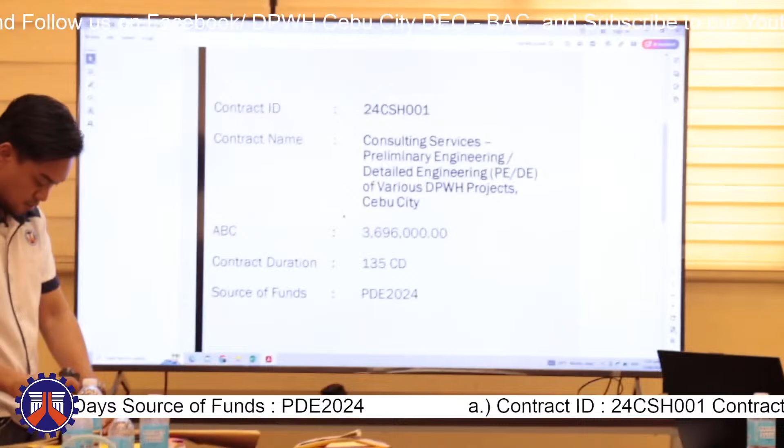Good afternoon. I'll be discussing the consultancy, contract ID 24CSH001, contract name Consulting Services, Preliminary Engineering / Detailed Engineering (PE/DE) of various DPWH projects Cebu City, with an ABC amount of 3,696,000 and a contract duration of 135 calendar days.

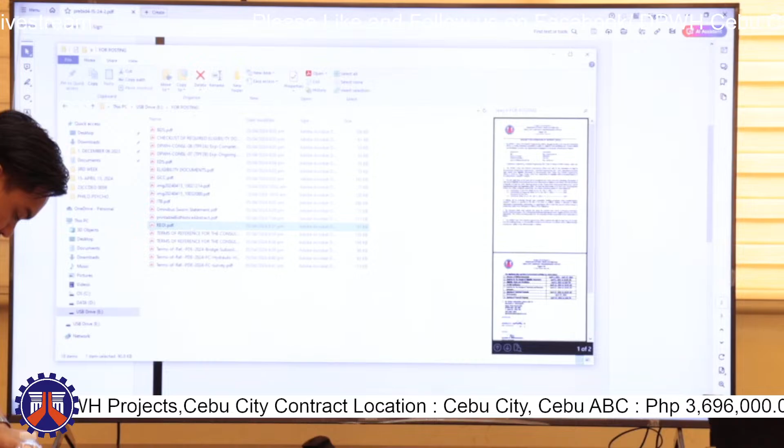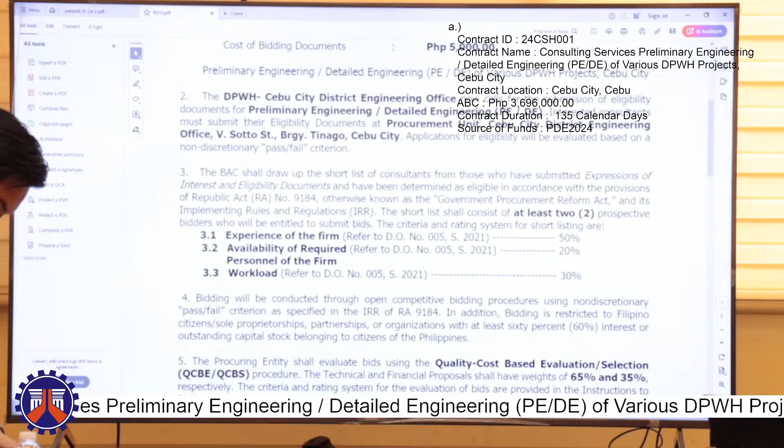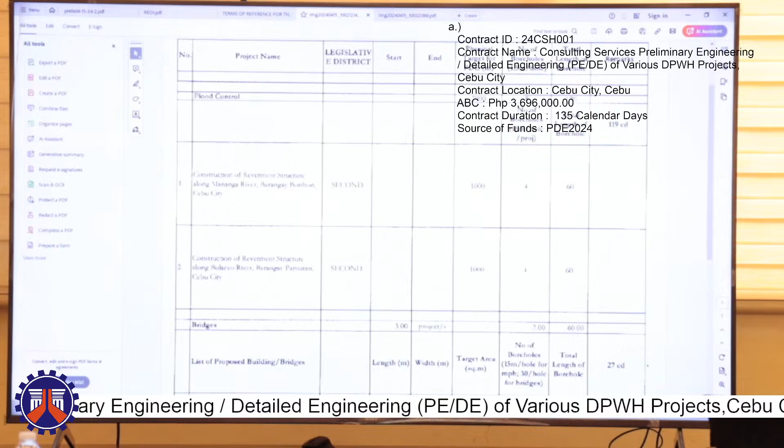This contract comprises 5 projects with consulting services for survey and detailed engineering plans, and also soil exploration or geotechnical investigation.

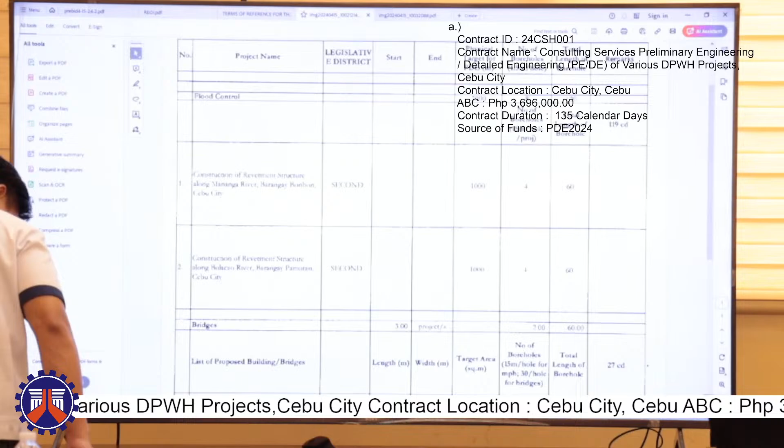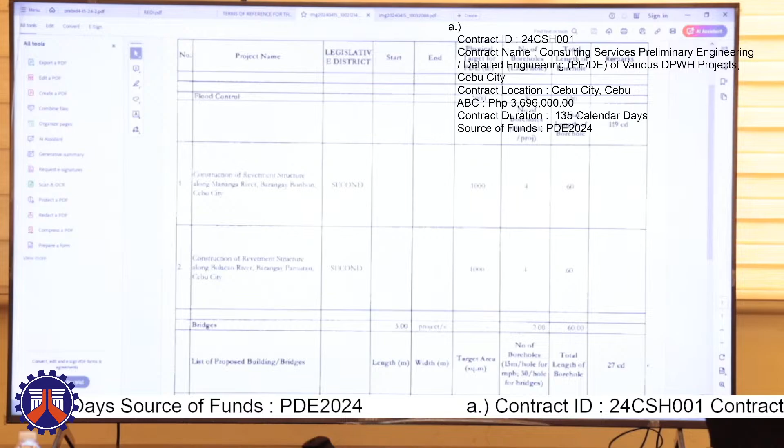For the first project, for flood control, we have the construction of revetment structure along Mananga River, Barangay Bonbon, Cebu City, with physical targets for PDE and survey. This is for survey services and plan generation, detailed engineering plans. We have 1 kilometer or 1,000 meters, and also 4 boreholes for soil exploration or geotechnical investigation, a total of 60 linear meters for the 4 boreholes.

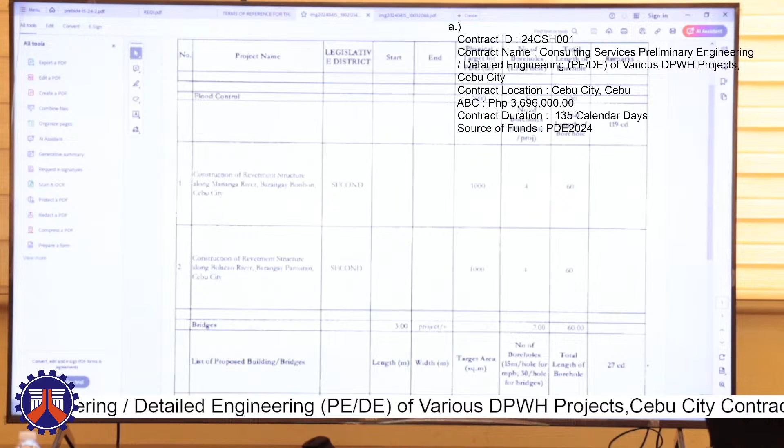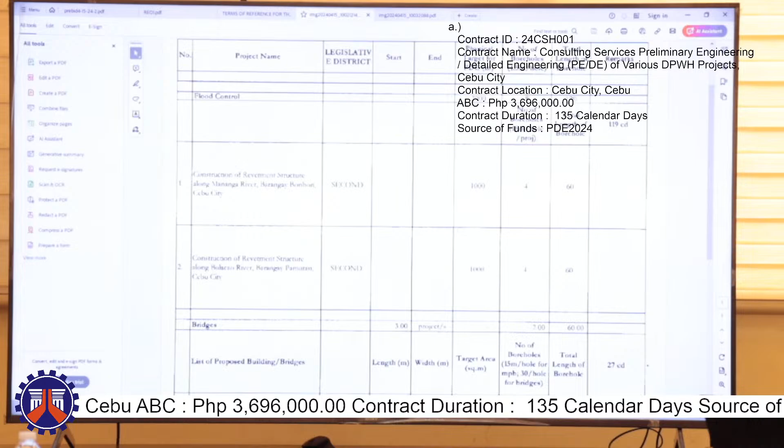For the second project for flood control, it's construction of revetment structure along Bulacao River, Barangay Pamutan, Cebu City. The same, 1,000 meters for survey services and detailed engineering plans, and also provision for 4 boreholes with 15 meters hole depth per hole, so a total of 60 linear meters for the boreholes.

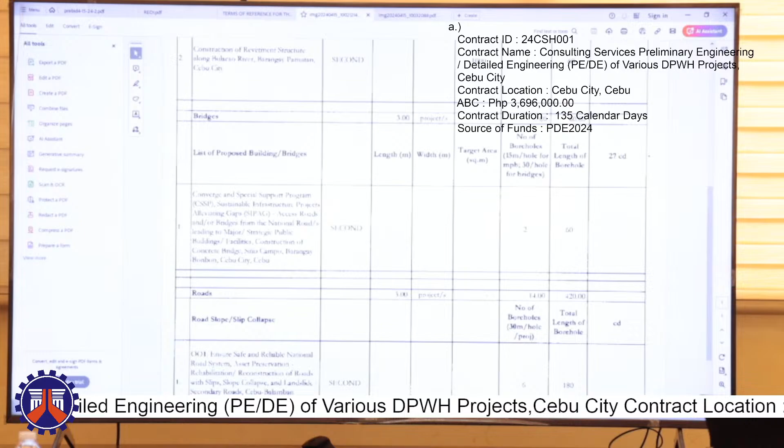Next project is for the bridge. We have the Convergence and Special Support Program (CSSP), Sustainable Infrastructure Project Alleviating Gaps (SIPAG), access road and/or bridges from the national road leading to major strategic public buildings and facilities, construction of concrete bridge, Sitio Campo, Barangay Bonbon, Cebu City. For this project, we only need geotechnical investigation, 2 boreholes with 30 meters depth, a total of 60 linear meters for the 2 boreholes.

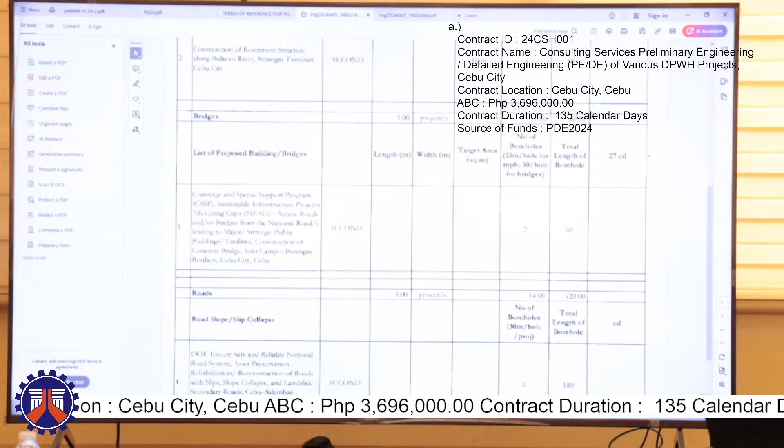For the road, we have 2 projects. Road slip collapse 001, ensure safe and reliable national road system asset preservation, rehabilitation, reconstruction of roads with slip, slope collapse and landslide, secondary road, Cebu Balamban Trans-Central Highway, kilometer 0015 plus 683 to kilometer 0015 plus 727. A provision of 6 boreholes with 30 meters depth and a total of 180 linear meters.

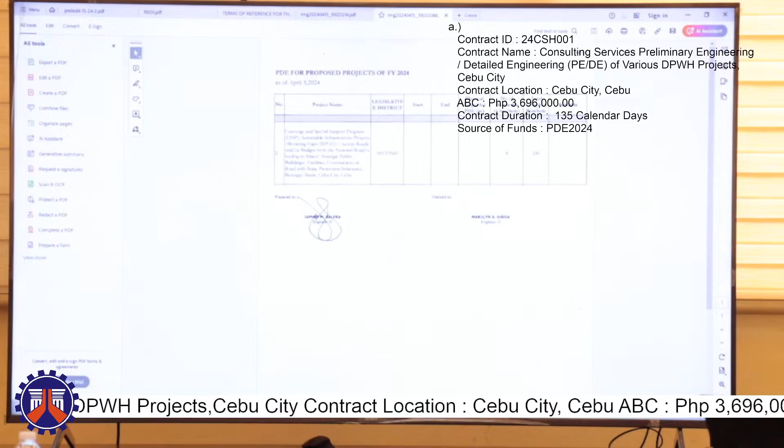The last project for the road is the Convergence and Special Support Program, Sustainable Infrastructure Project Alleviating Gaps (SIPAG), access road and/or bridges from the national road leading to major strategic public building facilities, construction of road with slope protection structures, Barangay Sinsin, Cebu City, with 8 boreholes. Correction: we have 30 meters per hole with 8 holes, so a total of 240 linear meters.

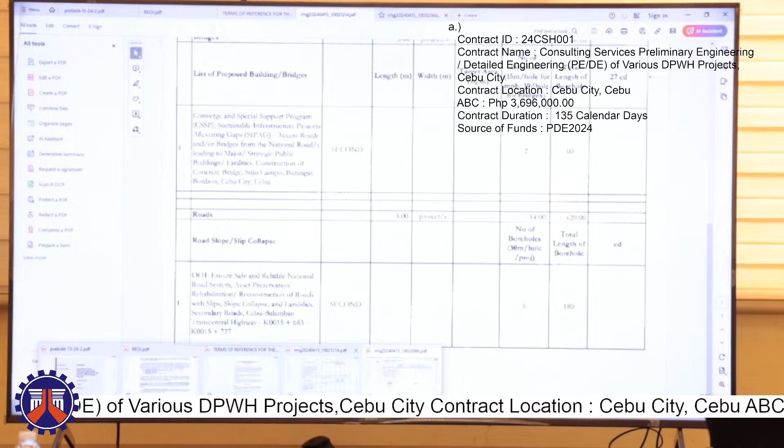So those 5 projects comprise this consultancy service, and together here are the terms of reference for the survey consultancy services and the detailed engineering plans services.

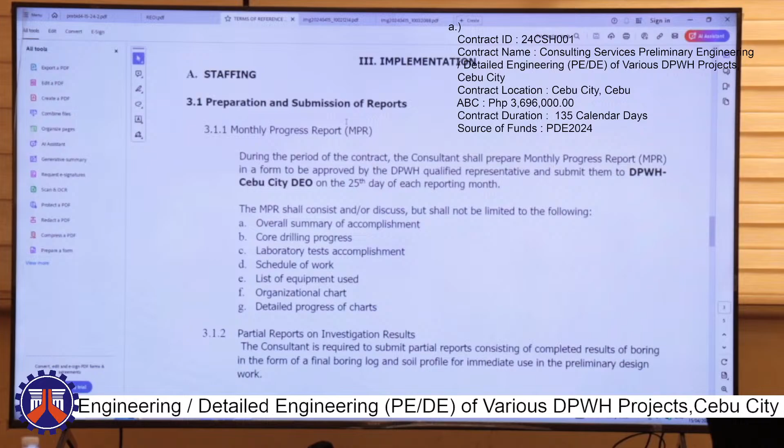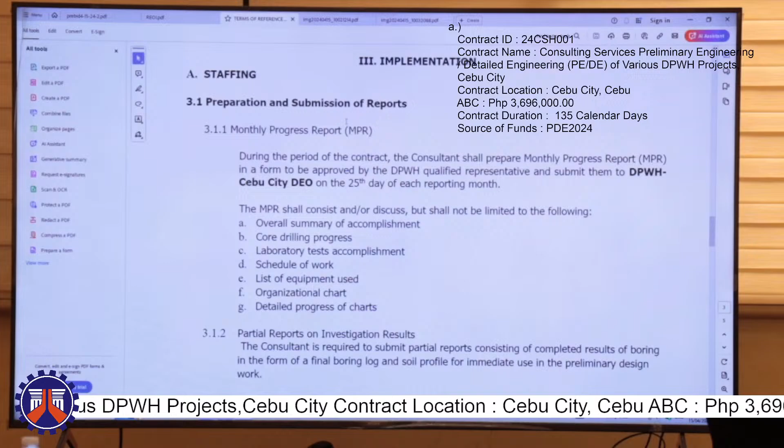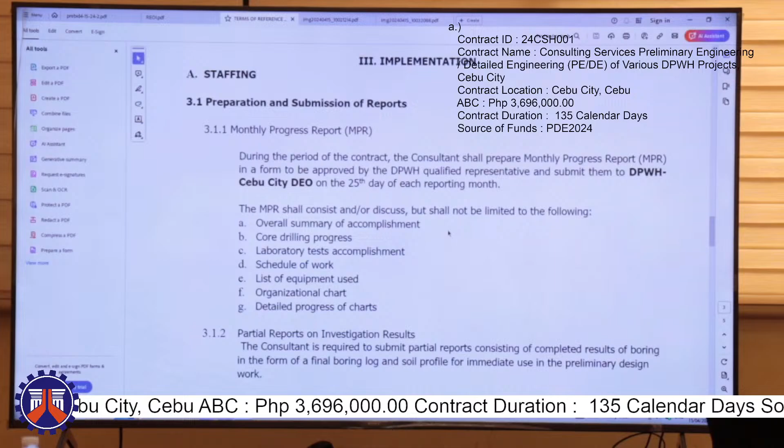For staffing or implementation, preparation, submission of reports: monthly progress report (MPR). During the contract period, the consultant shall prepare a monthly progress report in a form approved by the DPWH qualified representative and submit it to Cebu City DEO on the 25th of each reporting month. The MPR shall discuss, but not be limited to: overall summary of accomplishment, core drilling progress, laboratory test accomplishment, schedule of work, list of equipment used, organizational chart, and detailed progress chart.

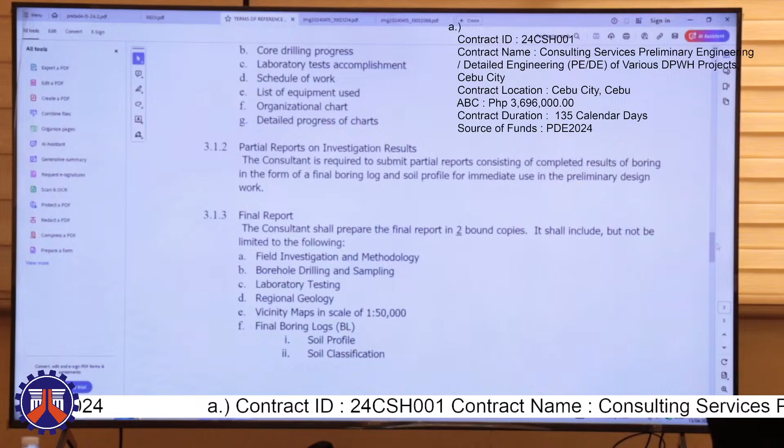We also have partial reports on investigation results. The consultant is required to submit partial reports consisting of completed results of boring in the form of final boring log and soil profile for immediate use in the preliminary design work.

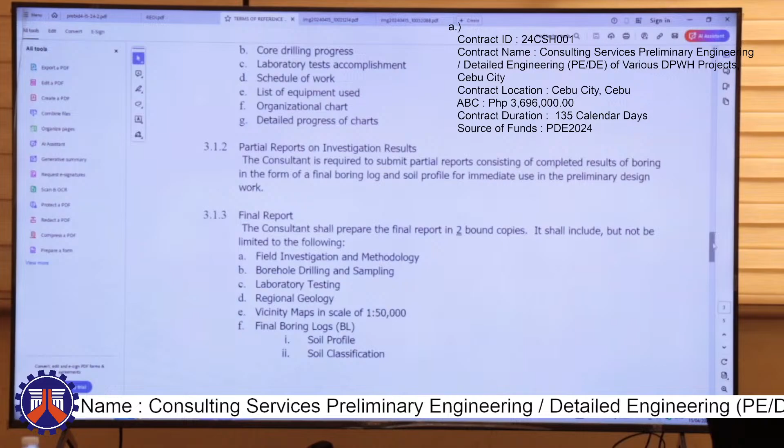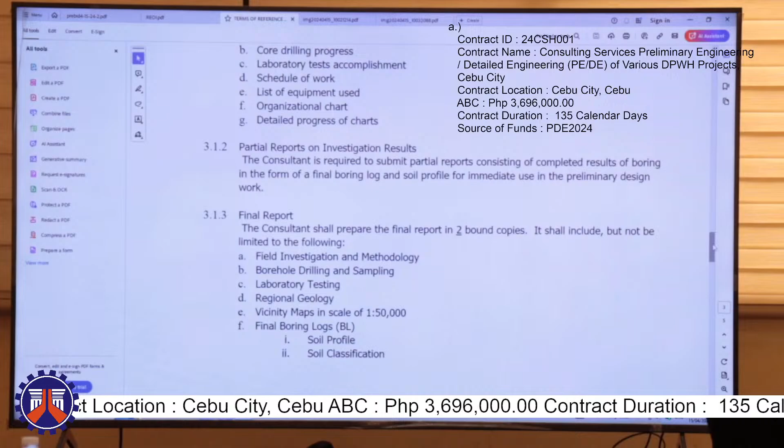For the final report, the consultant shall prepare the final report in 2 bound copies. It shall include but not be limited to: field investigation and methodology, borehole drilling and sampling, laboratory testing, regional geology, vicinity maps at scale 1:50,000, final boring logs with soil profile, soil classification, N values and/or rock quality designation, and groundwater table.

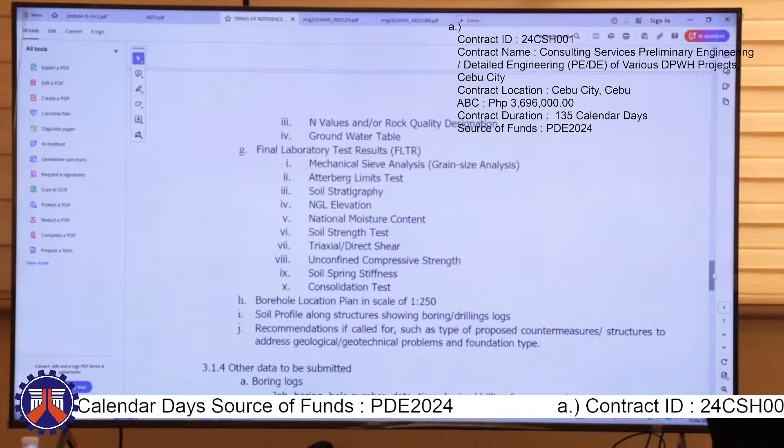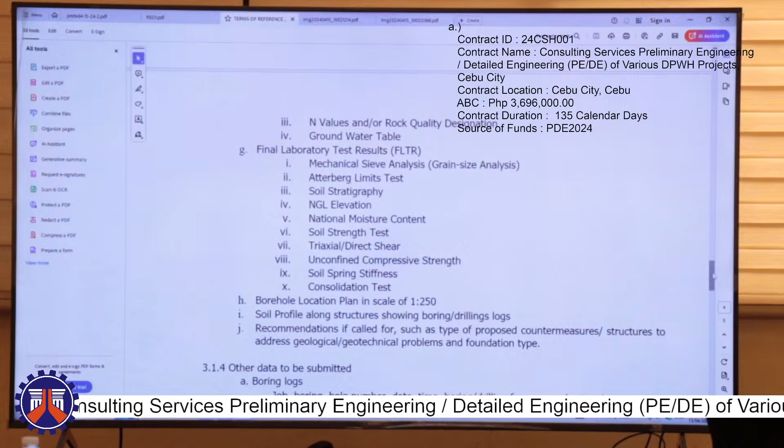We also have the final laboratory test results. These are the tests needed: mechanical sieve analysis or grain size analysis, Atterberg limits test, soil stratigraphy, NGL elevation, natural moisture content, soil strength tests including triaxial, direct shear, unconfined compressive strength, soil spring stiffness, and consolidation test.

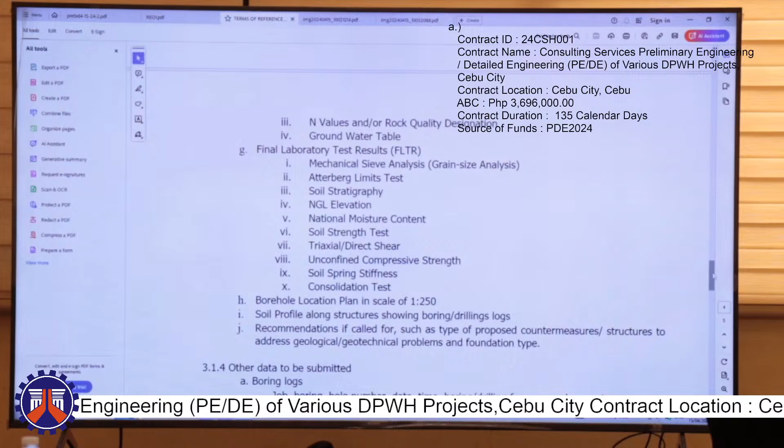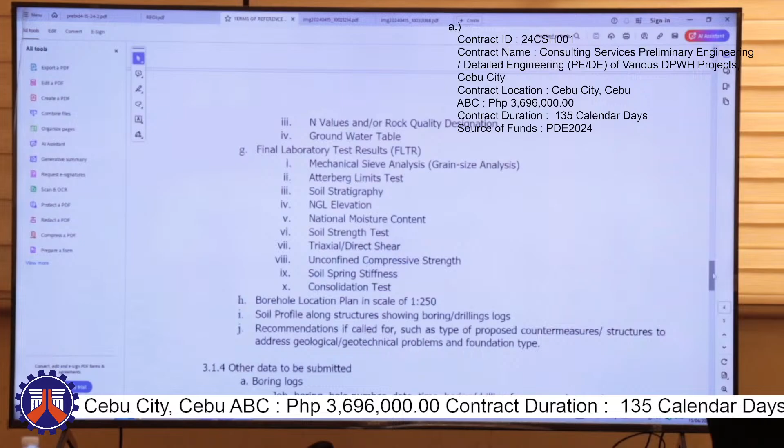Also needed in the final report is the borehole location plan at scale 1:250, the soil profile along structures showing boring drilling logs, and recommendations if called for, such as type of proposed countermeasures or structures to address geological and geotechnical problems and foundation type.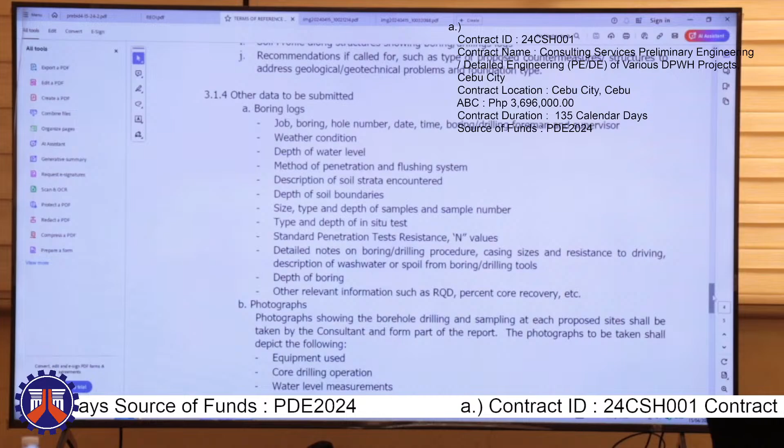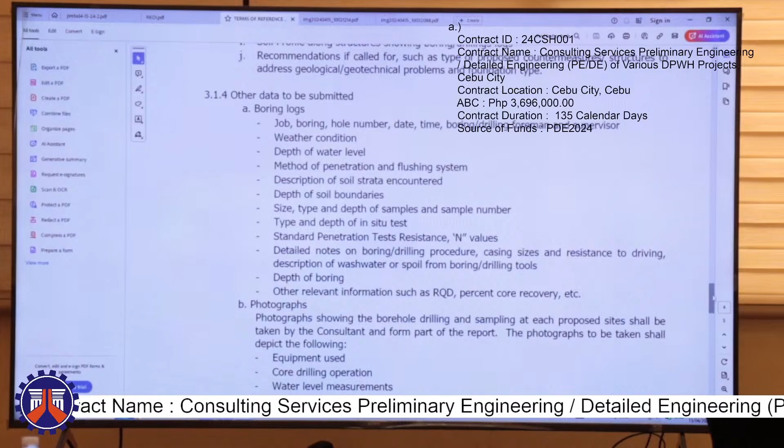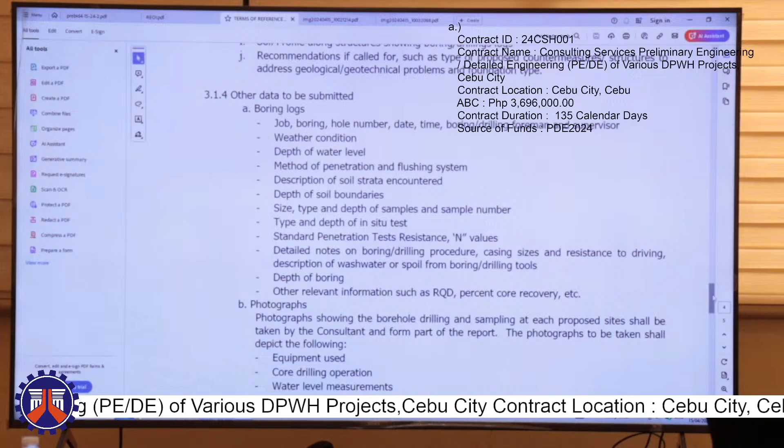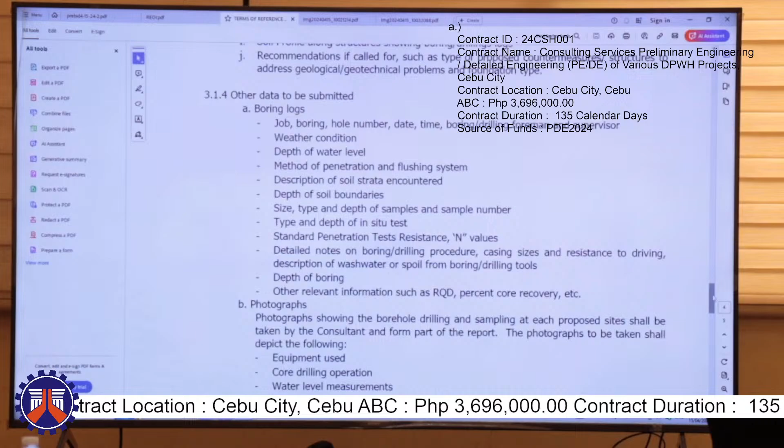Other data to be submitted includes boring log details with job number, boring hole number, date, time, boring drilling foreman and supervisor, weather condition, depth of water level, method of penetration and flushing system, description of soil strata encountered, depth of soil boundaries, size, type and depth of samples and sample number, type and depth of in-situ tests, standard penetration test resistance, N values, detailed notes on boring drilling procedure, casing sizes and resistance to driving, description of wash water or spoil from boring drilling tools, depth of boring, and other relevant information such as RQD, percent core recovery, etc.

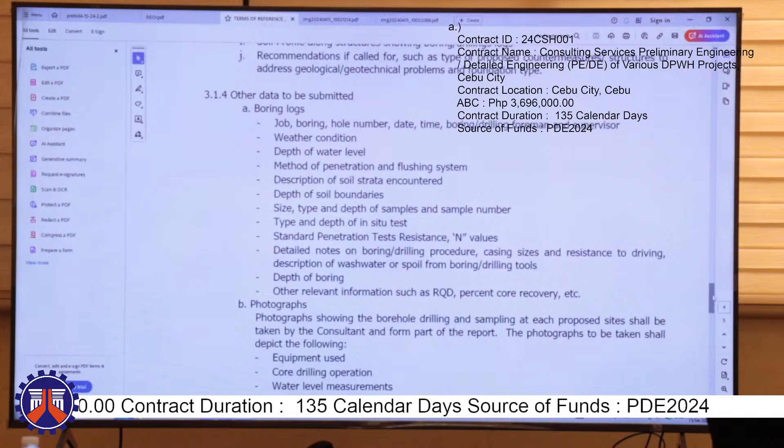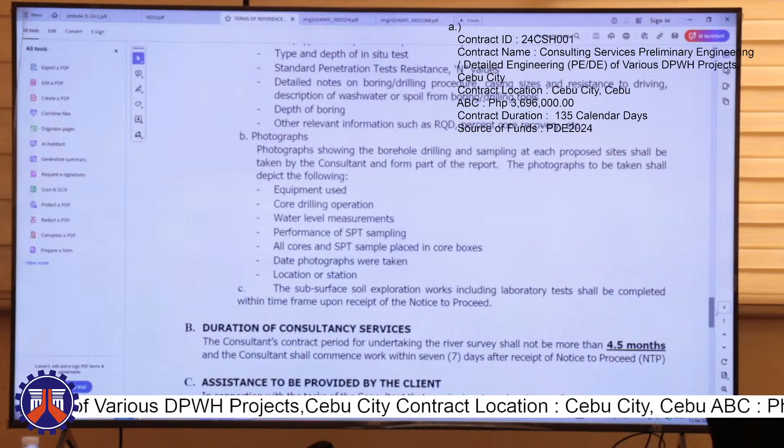Also needed in the final report is the photographs. Photographs showing the borehole drilling and sampling at each proposed site shall be taken by the consultant and form part of the report. The photographs to be taken shall depict: equipment used, core drilling operation, water level measurements, performance of SPT sampling, all cores and SPT samples placed in core boxes, date photographs were taken, and location or station. Also, the subsurface soil exploration works including laboratory tests shall be completed within the time frame upon receipt of the notice to proceed.

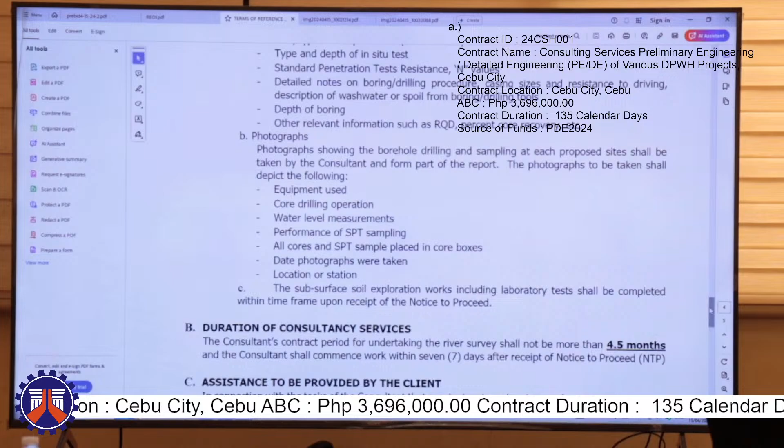So, duration of consultancy services: the consultant's contract period for undertaking the river survey shall not be more than 4.5 months, and the consultant shall commence work within 7 days after receipt of notice to proceed.

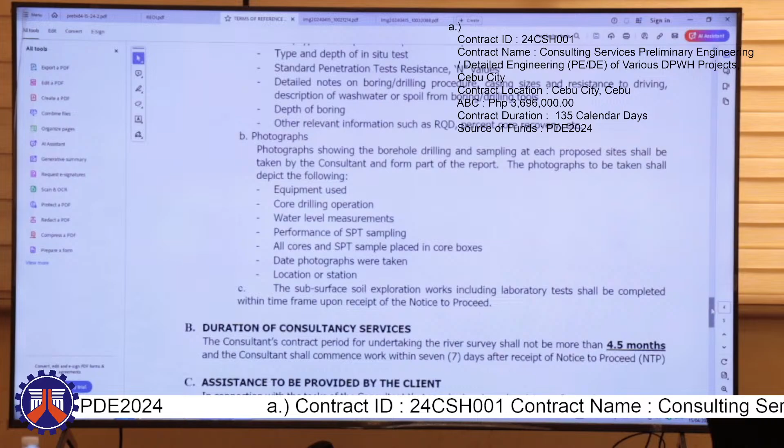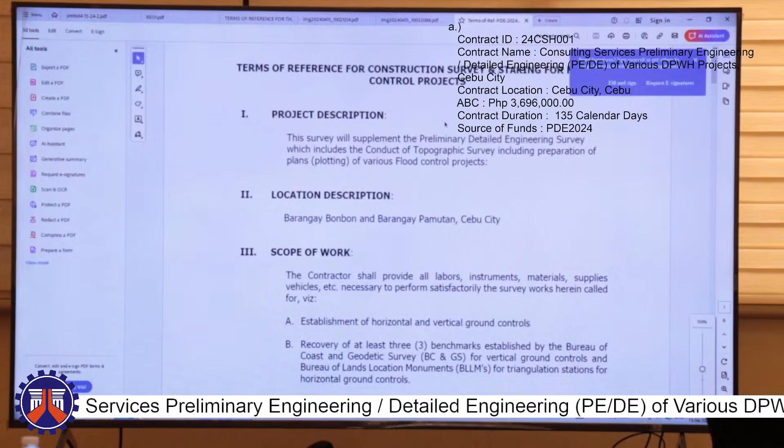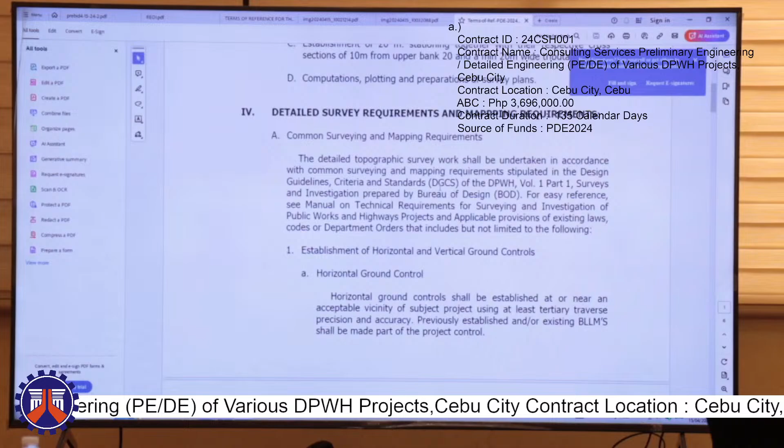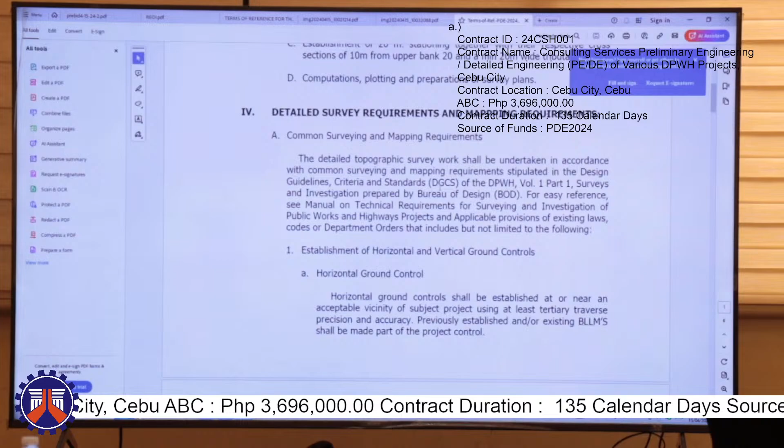For the survey services, detailed survey requirements and mapping requirements: for the common surveying and mapping requirements, the detailed topographic survey work shall be undertaken in accordance with common surveying and mapping requirements stipulated in the Design Guidelines, Criteria, and Standards (DGCS) of the DPWH, Volume 1, Part 1, the Surveys and Investigation prepared by Bureau of Design (BOD). For easy reference, see the manual on technical requirements for surveying and investigation for public works and highways projects, and applicable provisions of existing laws and codes or department orders, which include but are not limited to the following.

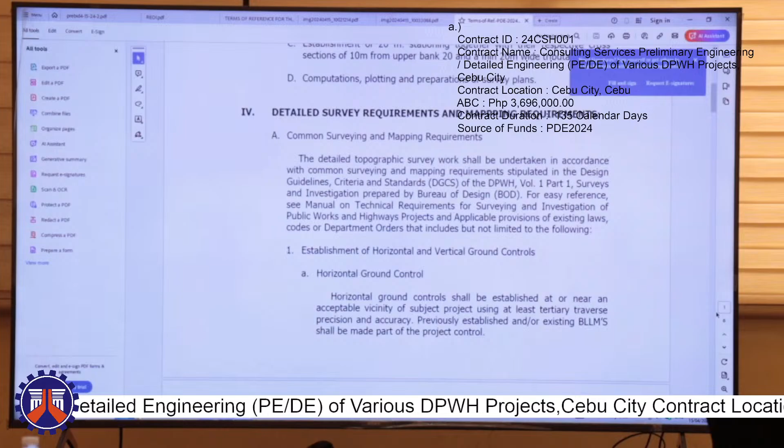We'll need the establishment of the horizontal and vertical ground controls. The horizontal ground control shall be established at or near an acceptable vicinity of the subject project using at least tertiary traverse precision and accuracy. Previously established and/or existing BLLMs shall be made part of the project control.

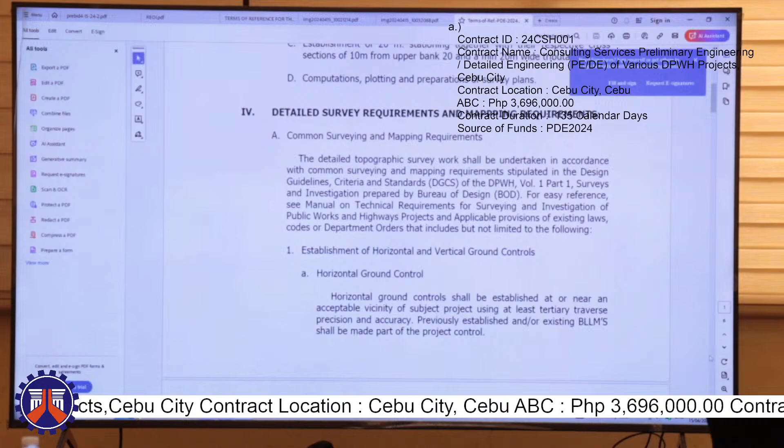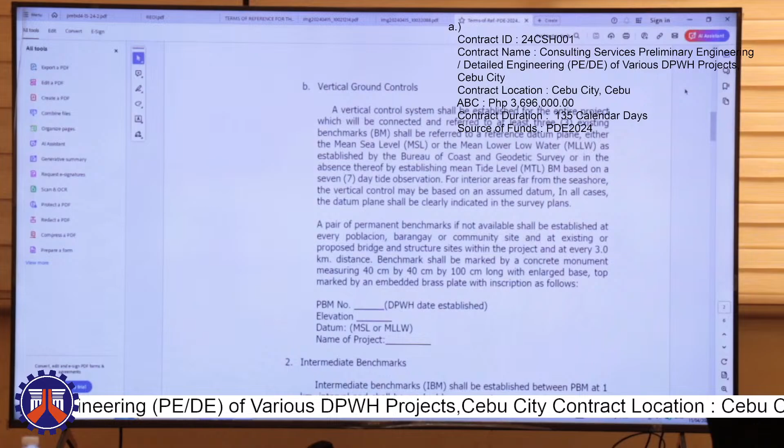Also, we need the vertical ground controls. A vertical ground control shall be established for the entire project, connected and referred to at least 3 existing benchmarks, and referred to a reference datum plane, either the mean sea level or the mean lower low water as established by the Bureau of Coast and Geodetic Survey, or in the absence thereof, by establishing the mean tide level benchmark based on a 7-day tide observation. For interior areas far from the seashore, the vertical control may be based on an assumed datum. In all cases, the datum plane shall be clearly indicated in the survey plans.

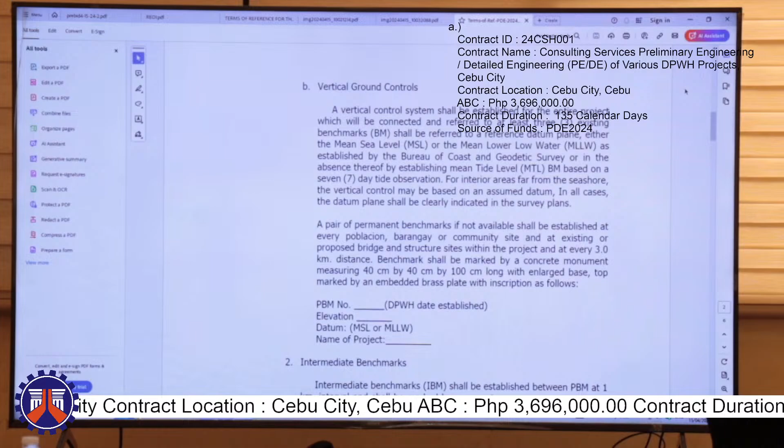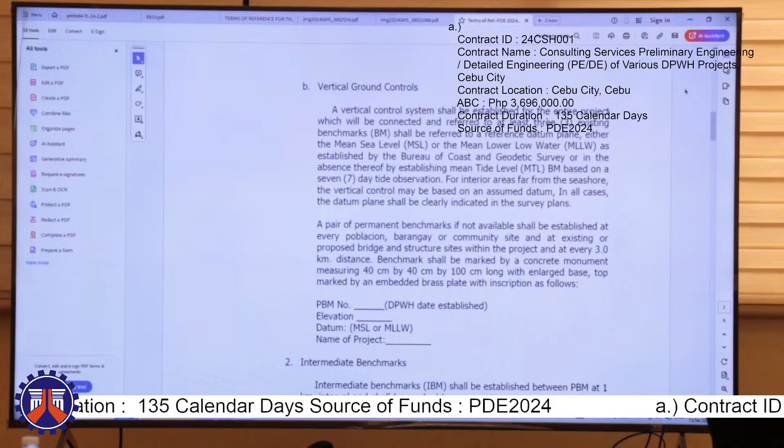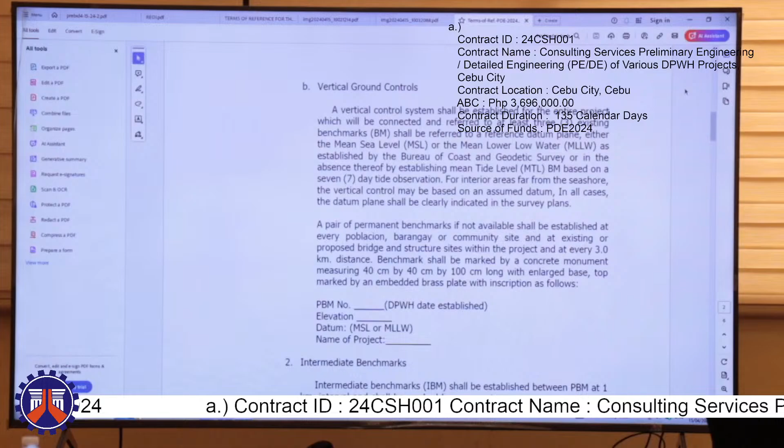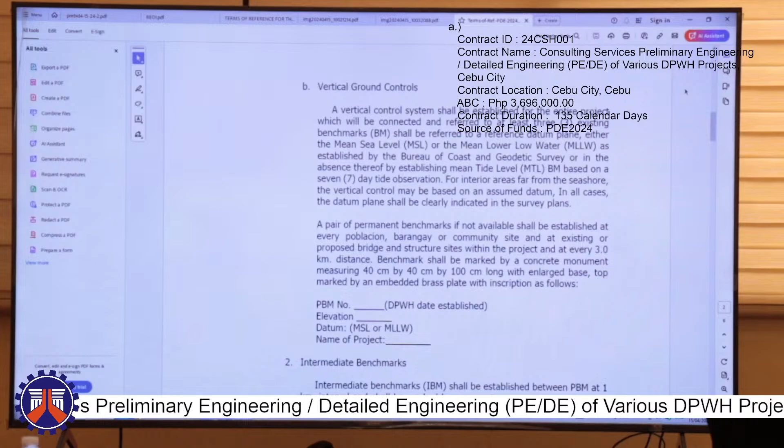A pair of permanent benchmarks, if not available, shall be established at every poblacion, barangay, or community site, and at existing or proposed bridge and structure sites within the project, and at every 3 kilometers distance. Benchmarks shall be marked by a concrete monument measuring 40 cm by 40 cm by 100 cm long, with an enlarged base, top marked by an embedded brass plate with inscriptions as follows: the PBM number, with the DPWH date established, the elevation, the datum, and the name of project.

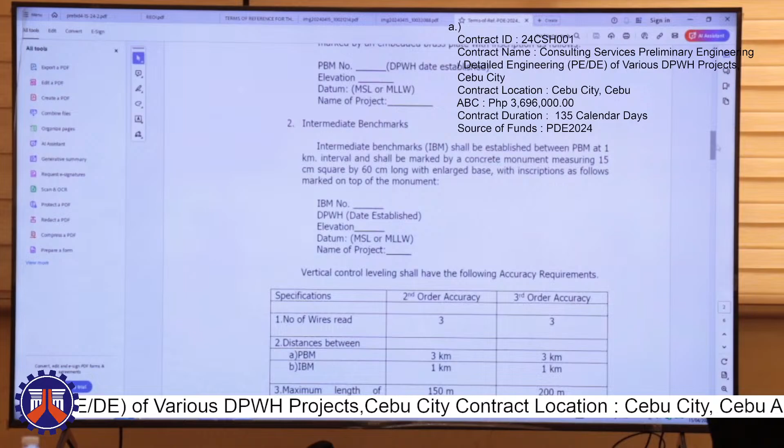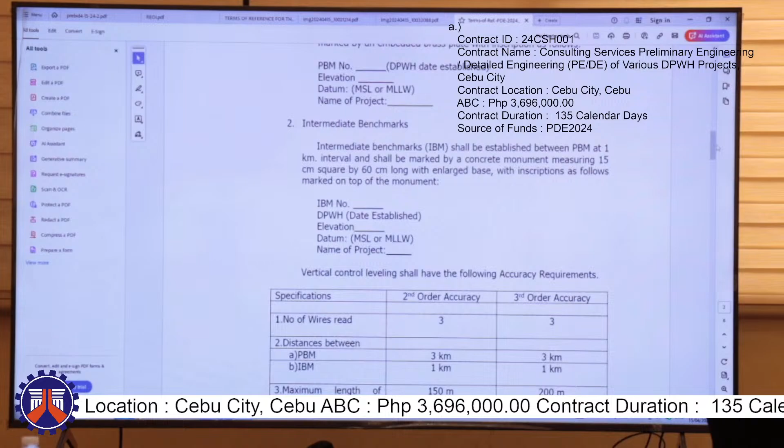For the intermediate benchmarks, these shall be established between PBMs at 1 kilometer intervals and shall be marked by a concrete monument measuring 15 cm square by 60 cm long, with an enlarged base, with inscriptions marked on top of the monument as follows: the IBM number, with the elevation, the datum, and the name of project.

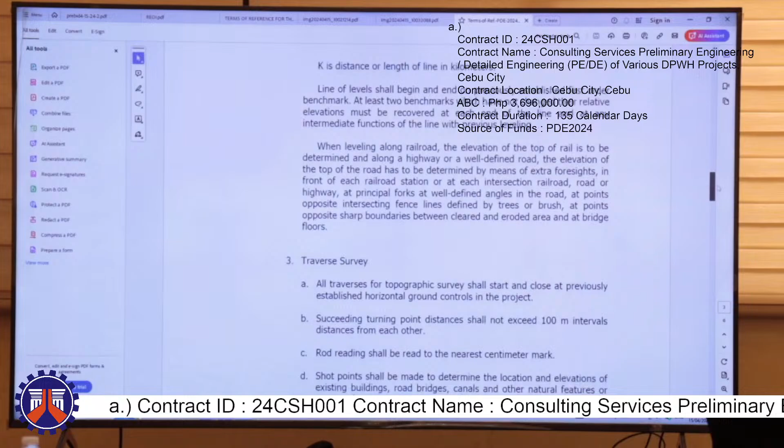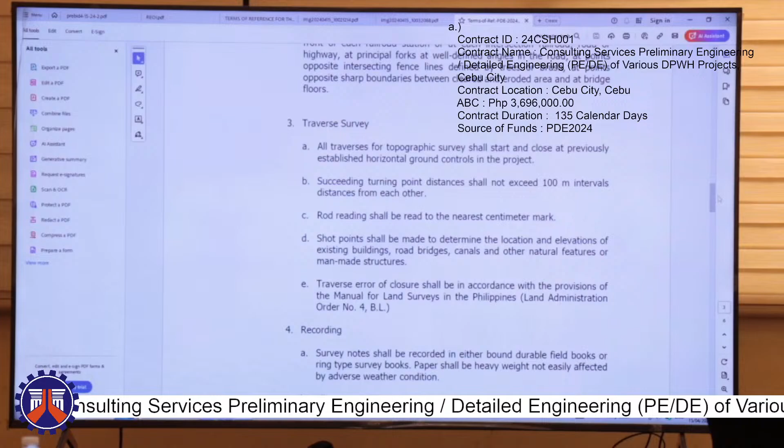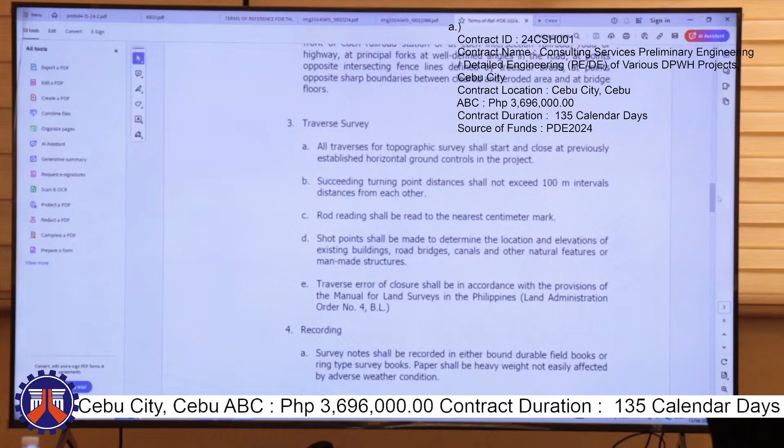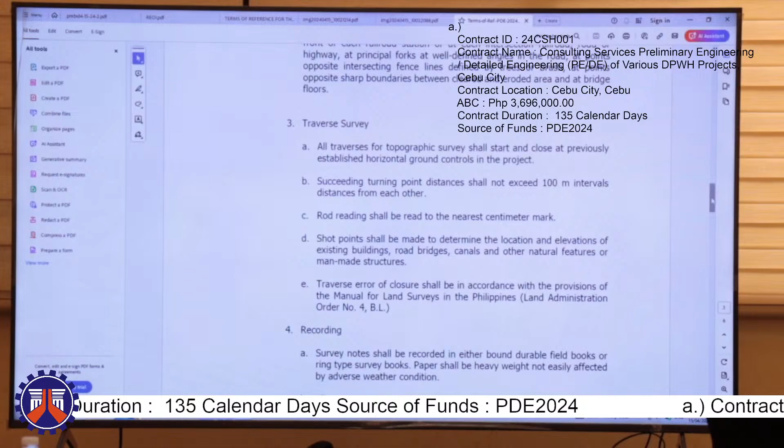Thirdly is the traverse survey. All traverses for topographic survey shall start and close at previously established horizontal ground controls in the project. Succeeding turning point distances shall not exceed 100 meter intervals from each other. Rod reading shall be read to the nearest centimeter mark. Shot points shall be made to determine the location and elevation of existing buildings, roads, bridges, canals, and other natural features or man-made structures. Traverse error of closure shall be in accordance with the provisions of the Manual for Land Surveys in the Philippines or the Land Administration Order Number 4 BL.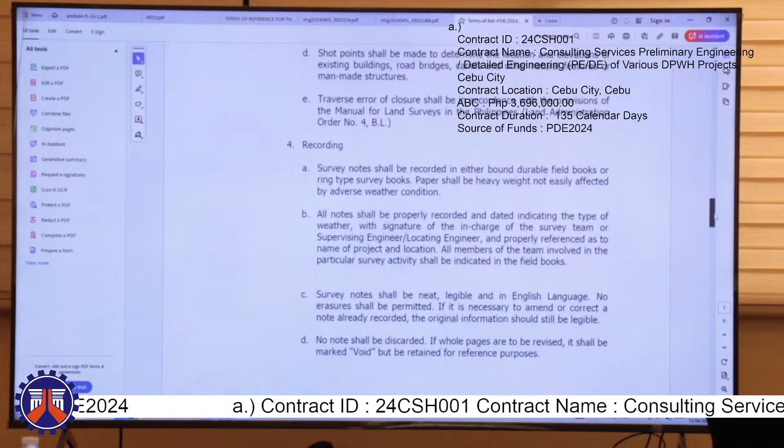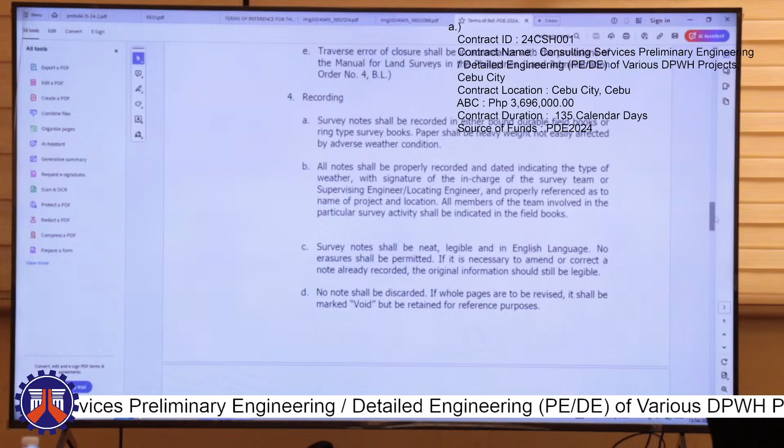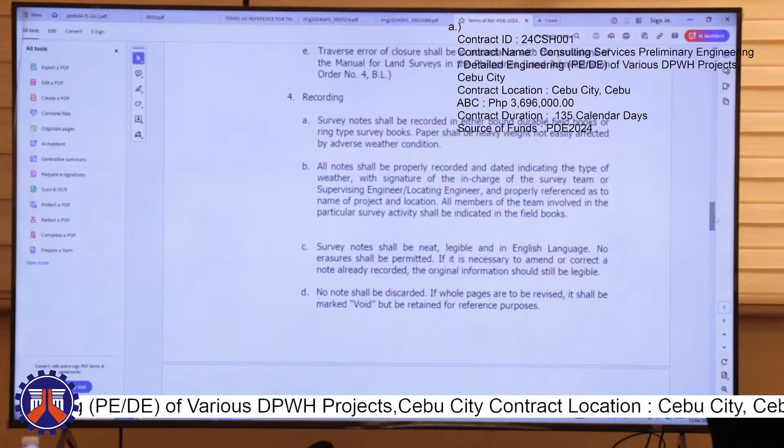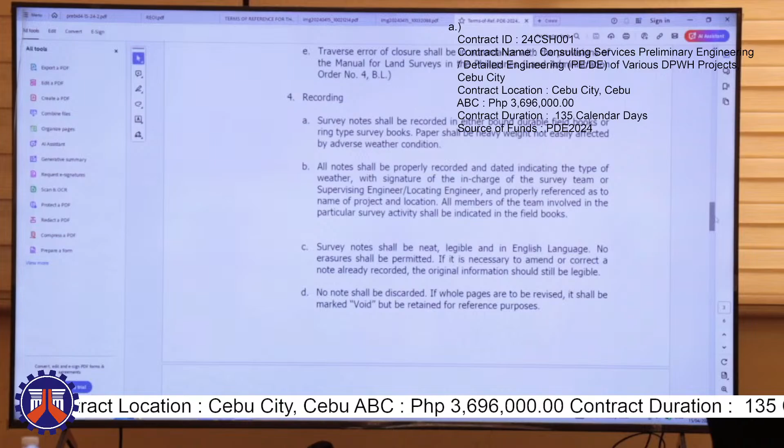For the recording, survey notes shall be recorded in either bound durable field books or ring-type survey books. Paper shall be heavyweight, not easily affected by adverse weather conditions. All notes shall be properly recorded and dated, indicating the type of weather, with signature of the in-charge of the survey team, supervising engineer, locating engineer, and properly referenced as to name of project and location. All members of the team involved in the particular survey activity shall be indicated in the field books. Survey notes shall be neat, legible, and in English language.

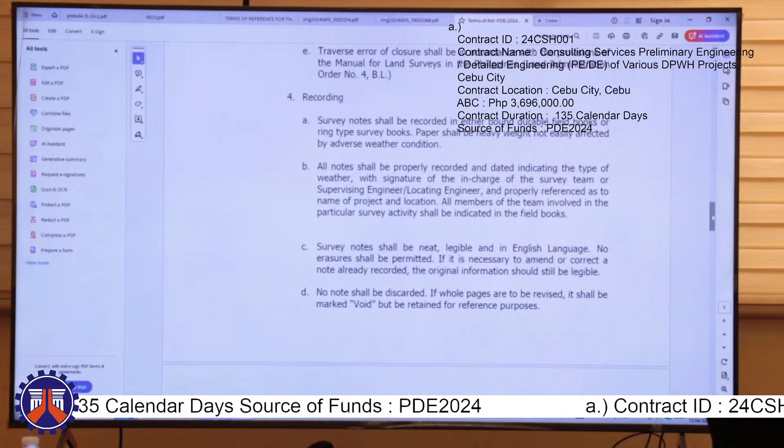No erasures shall be permitted. If it is necessary to amend or correct a note already recorded, the original information should still be legible. No note shall be discarded. If whole pages are to be revised, they shall be marked void but retained for reference purposes.

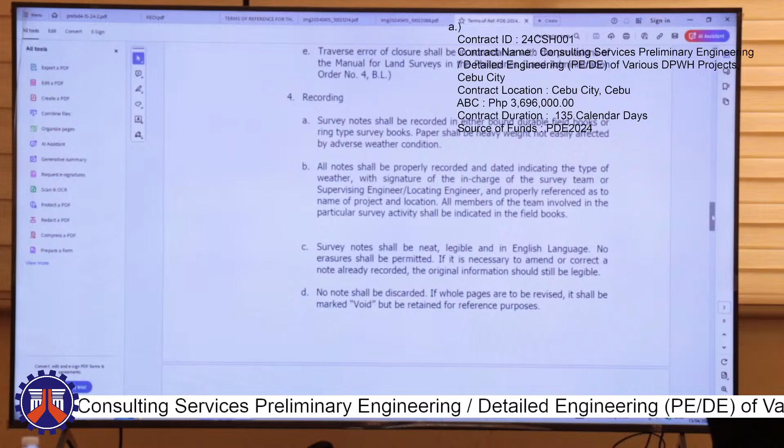Survey of existing features: survey of all natural and man-made topographic physical features.

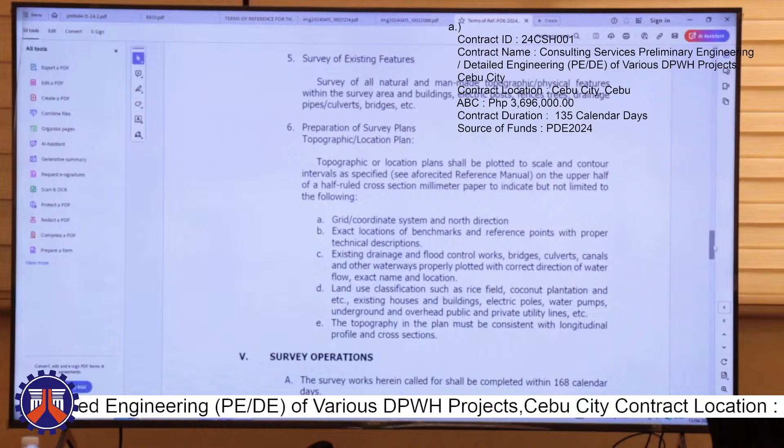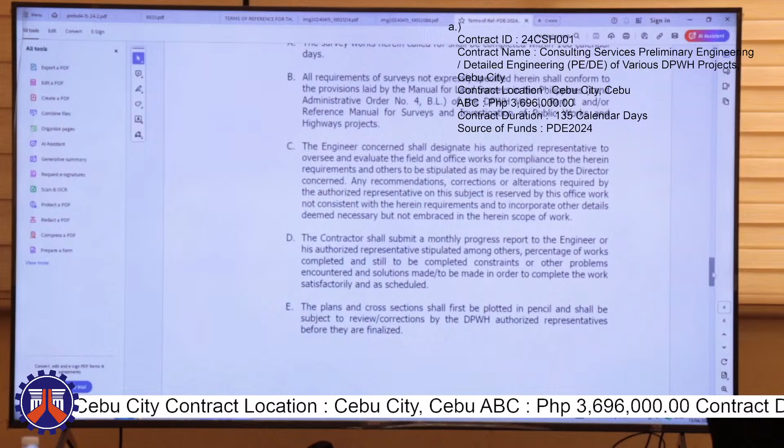All of this can be read or seen in the terms of reference, which you can download from the advertising websites and the PhilGEPS. So any questions with regards to this project or contract, you can visit or schedule a meeting with the Planning and Design Sections. Thank you.